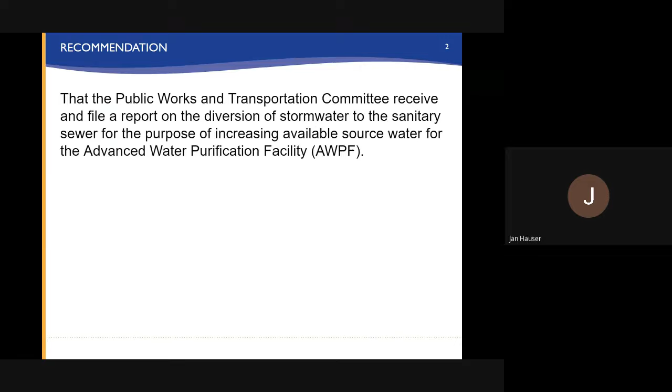Okay, at the January 4th City Council meeting, there were a couple questions asked related to this issue. First one is it feasible to pump or divert stormwater into the sanitary sewer for the purpose of increasing the volume of treated wastewater available for the production of recycled water at the AWPF? The second question was, does the city have a policy on the use of gray water systems? So I'm going to address that first question first.

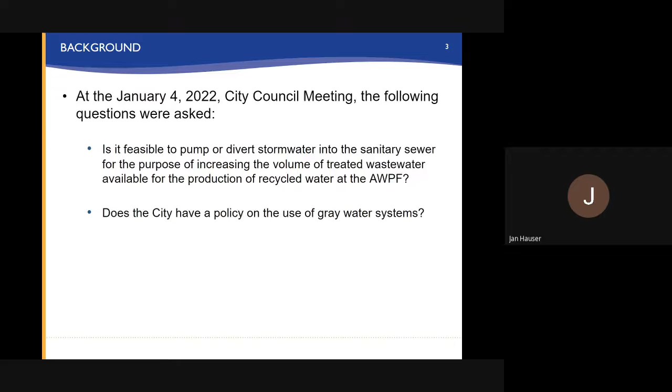So to put it in perspective and to put it in context, I want to talk a little bit about our existing facilities. The current AWPF is designed to treat 6.25 million gallons per day. To do that, it needs 8 million gallons of treated wastewater as its input. The other 1.7 million gallons is reject water or wastewater that is then conveyed to our ocean outflow, mixed with the treated wastewater effluent and sent to the ocean.

Okay, the facility is designed to ultimately be expanded to 25 million gallons per day, but obviously to do that, we need the treated wastewater source water. So we currently have enough treated wastewater today to double the size of the plant to 12.5 million gallons per day.

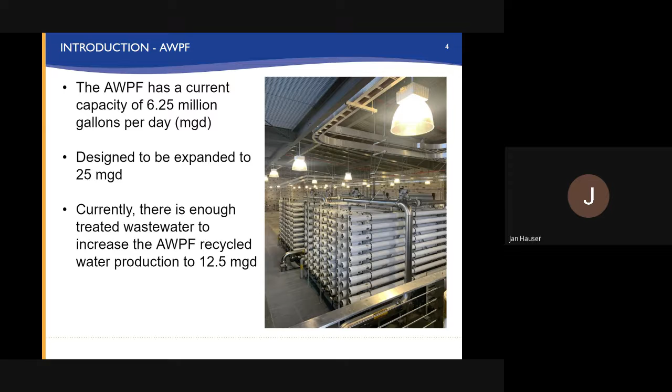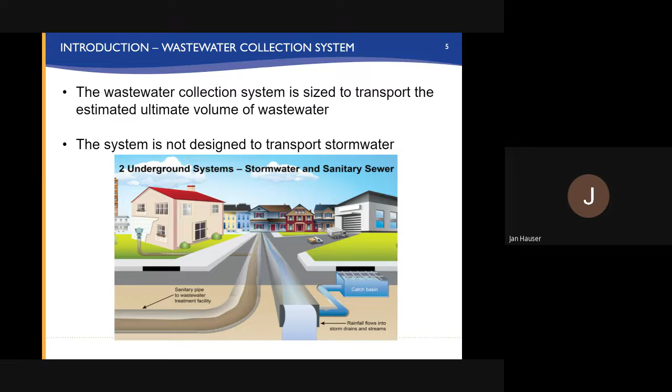So the second part of the system I want to talk about is the wastewater collection system. So the wastewater collection system is approximately 400 miles of pipe that are buried in the ground throughout the city that are sized to transport and convey produced wastewater from residential, commercial, and industrial facilities to the wastewater treatment plant. The system is not sized to take stormwater. So putting stormwater into the sanitary sewer system potentially would overtax the system and cause backups. So that would have to be looked at very closely.

And finally, the other piece of infrastructure in this equation is the wastewater treatment plant itself. So it is designed, again, to treat domestic, commercial, and industrial wastewater. And it also is required to feed water over to the advanced water purification facility at a steady rate, which requires equalization.

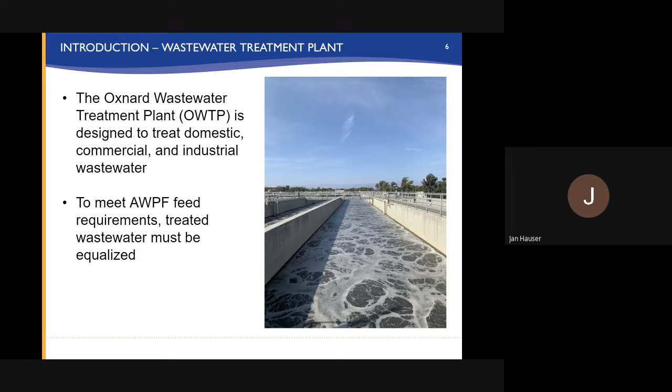So the areas that will need to be evaluated and looked at closely if we consider further putting stormwater into the sanitary sewer collection system fall into really three areas. First one is regulatory, the second one is technical, and the third is operational. So the first thing we would need to look at is the impacts on our regulated system. So we are very highly regulated by the state through a National Pollution Discharge and Elimination System permit. That permit sets water quality constituent limits in the water that we put out into the ocean, which will be modified or changed the more that we treat at the advanced water purification facility. So that will have to be looked at and evaluated very closely.

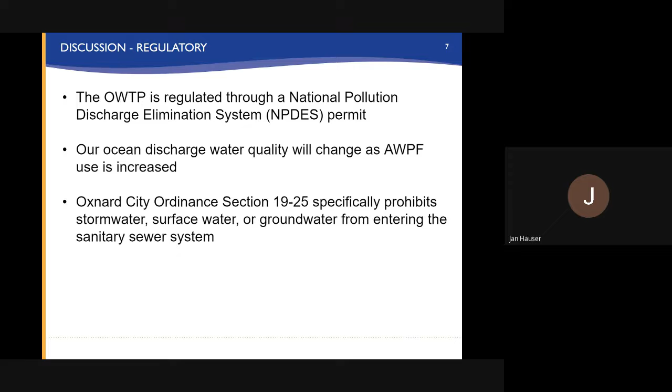The permit also prohibits some things getting into the sanitary sewer system. Specifically, it prohibits stormwater, surface water, and groundwater from entering the sanitary sewer system, which is identified in the city ordinance section 19-25.

The second area that will need to be looked at very closely is technical aspects of doing this. And really, stormwater flows fall into kind of two modes. One is dry weather flows, which are continuous, they're very low flows, and generally have very poor water quality. Diverting these flows will not help our volumes at the advanced water treatment plant, and these kind of diversions are generally used to increase water quality. So we actually have one of these systems in our wastewater system out at Kiddie Beach to improve the water quality on Kiddie Beach.

The second mode is really wet weather flows induced by rainstorms, and that's really the focus of this topic. So these flows are generally characterized by very high volumes of water, very low quality of water during the first flush, and increasing quality as the event proceeds. And again, these can be very, very large volumes of water that would overtax our system if we just allowed them to enter the system uncontrolled. So we would need to look at some type of storage.

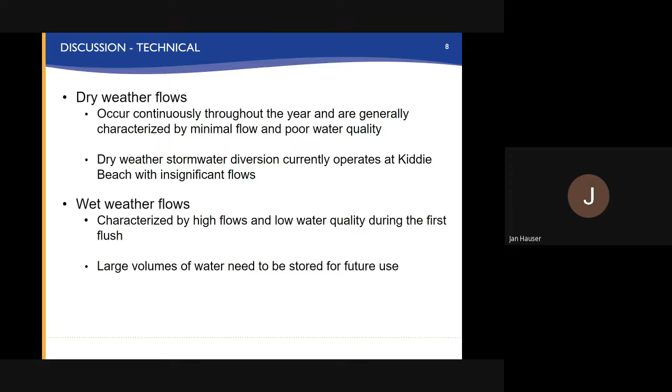So then the third area is operational, and that really is how does diverting stormwater into our system affect the operation of the system, right? And again, probably the most important aspect is large volumes of water entering our system that are not designed to handle these very large flows. So we would again need to find a way to store large volumes of water and then control the amount we put back into the sanitary sewer system over a long period of time. We do have a hydraulic model of the system which we could use to evaluate this issue. And then there may be potential unknown impacts on the performance of the treatment processes themselves that would need to be looked at.

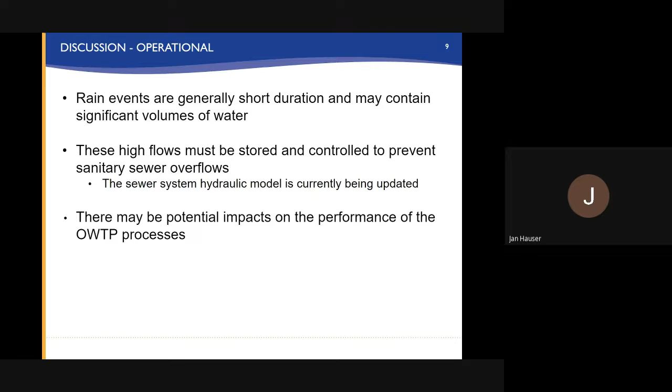So in summary, this is a very complex issue that will require further and detailed analysis to determine all the issues, all the risks that would come with diverting stormwater into the sanitary sewer system.

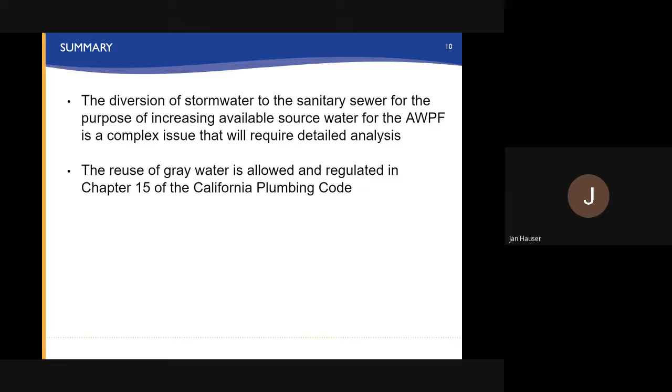And then finally, I just wanted to talk a little bit about the city policy on the use of gray water systems. And while there is no specific policy in the city, we do follow the California Plumbing Code, which does allow for gray water systems specifically in chapter 15. As of today, we do not have any gray water systems in the city. So there's no direct financial impact on receiving and filing this report.